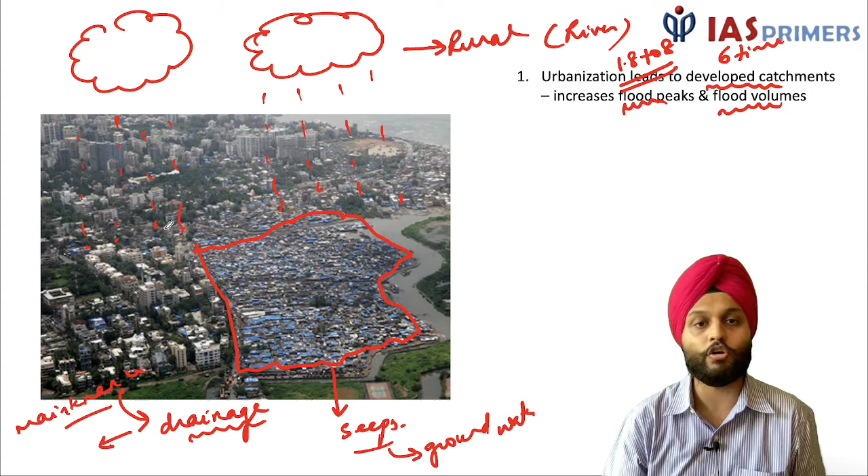So imagine the amount of water combined with high population density - the amount of damage it is going to cause. Particularly in slum areas, where the marginalized community lives in low-lying areas, they are worst affected. Their impact is much worse compared to other areas which are better off. So this is another perspective that needs to be looked into.

The United Nations Disaster Risk Reduction agency, responsible for disaster management, says it is unplanned urbanization and poor governance which intensifies the problem of urban floods. We know cloudbursts take place every year, so corrective measures are required, but they aren't being done. Hence, this is a man-made problem.

Stormwater drainage systems are getting overwhelmed, plus there is poor maintenance. Then there is poor solid waste management, with plastic waste choking the drainage pipes and decreasing their capacity to function.

And then there is the issue of encroachments taking place, like this example of slums, as well as encroachment into and identification of new lands for urbanization.

For example, in the nearby NCR region, there is a lake known as the Najafgarh Jheel. This used to be about 240 square kilometers, extending across areas like Gurugram, Rewari, and Jhajjar - a very, very big lake.

People are trying to divert and reduce the area of this lake, transferring it to identify new properties. Look at the construction activity going on in this area. This is being done by the unholy nexus of the political class, the bureaucracy, as well as the realty and construction sector - the corporates.

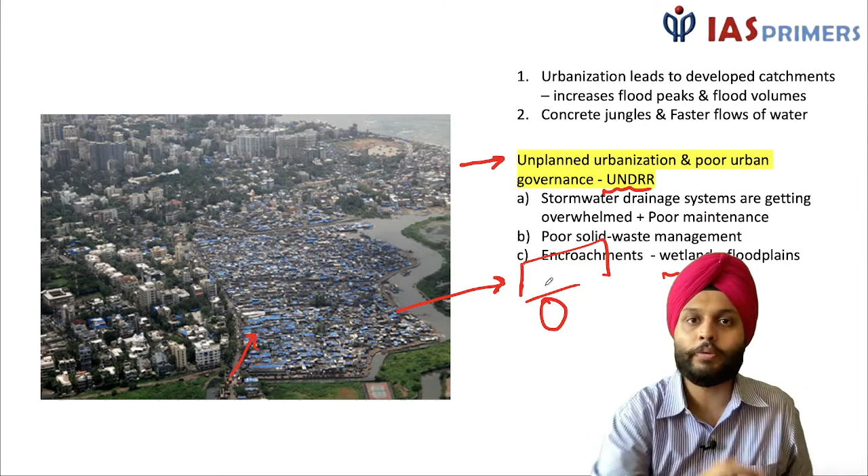Now moving on to the impact or implications of urban floods. You can see the image here and imagine the problems you might encounter - for example, if you're driving through it, you may be stuck in a traffic jam because it isn't possible to move, causing a lot of inconvenience.

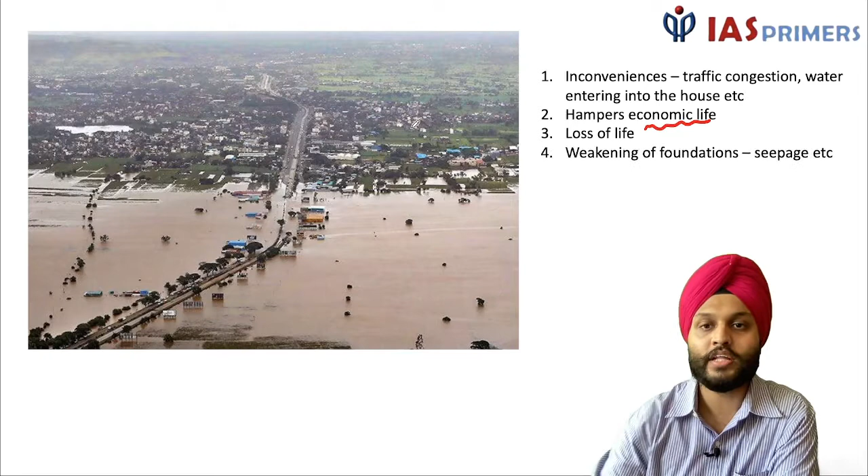Sometimes water enters your house and you're taking buckets and throwing that water out. This naturally affects all aspects of normal urban life and hampers economic life. There is also, sadly, loss of life, and weakening of foundations, construction damage, and loss of property.

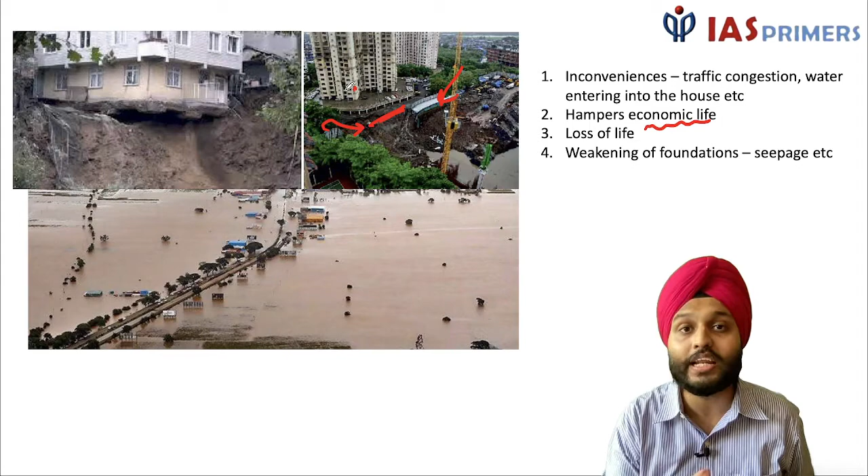Look at this image - this happened in Bombay recently. You can see how the apartment was almost about to fall. Because of the rain, erosion is taking place underneath. People aren't able to see it on the land, but underneath it's causing a lot of damage. This can be a major catastrophe - imagine if this building had collapsed, how many lives would have been lost. This is a major cause of concern.

What we often miss is the impact floods have on poor and marginalized communities. It is the poor who live in unwanted, low-lying areas that are more prone to floods. If this was a flyover, the land normally slopes downward, so most of the water comes into places where poor people take refuge under the flyover area. This is again a cause of concern.

Look at how the slums here are affected. Urban areas where the rich live won't be affected as much as people living in slums. Sometimes their houses aren't made of proper cement - they are temporary structures, so there's loss of property and loss of economic activities, because these people live hand-to-mouth.

Someone with employment in the formal sector can survive even without work - he'll get a fixed salary regardless. But for the poor, it's much more severe. When water is stagnant in a place, it's prone to cause diseases, and they are the ones poorest in income as well as most prone to diseases and disaster. This needs to be looked into.

Now moving to the last part of our session - recommendations or corrective measures. One obvious way is that we need to restructure and reconsider our stormwater drains, which as well as natural drains need to be restored and widened.

Now because urbanization has taken place, let's say this was the original area in which people were living, but over the course of time the urban area increases while the drainage system remains the same. So the drainage pipes need to be widened, and their capacity needs to be improved from time to time.

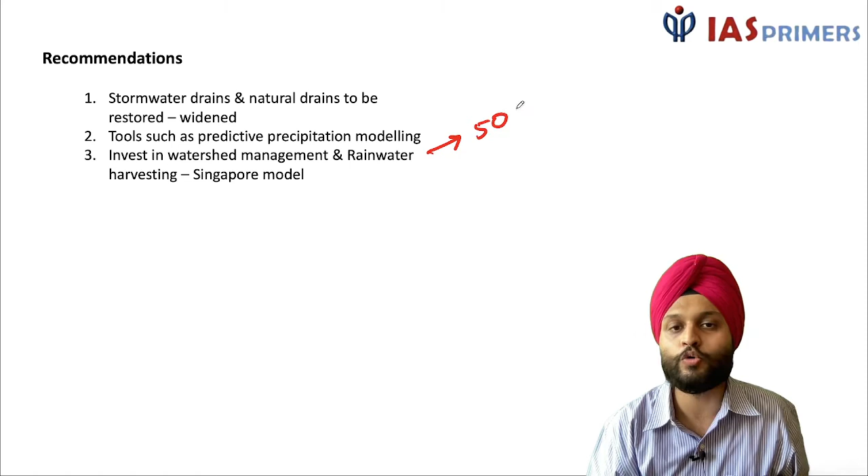Then we can learn from other countries. Singapore is one good example where there is scarcity of water. It's around the sea, but still there is scarcity of water, and it also witnesses huge amounts of rain. So what it has done is it has been able to use 50% of the land for rainwater harvesting.

So this can be done in any of the cities. We all know urban areas are short of water, so the buildings and apartments, whenever rain takes place, it can move to an underground tank. We can work on this model, and later this water can be used. Or we can look at construction of more parks and open land, which allows the percolation of water into the ground. So many places I have seen where there are huge parks built - apartment, then park, apartment, then a park. So parks are also very helpful in this regard.

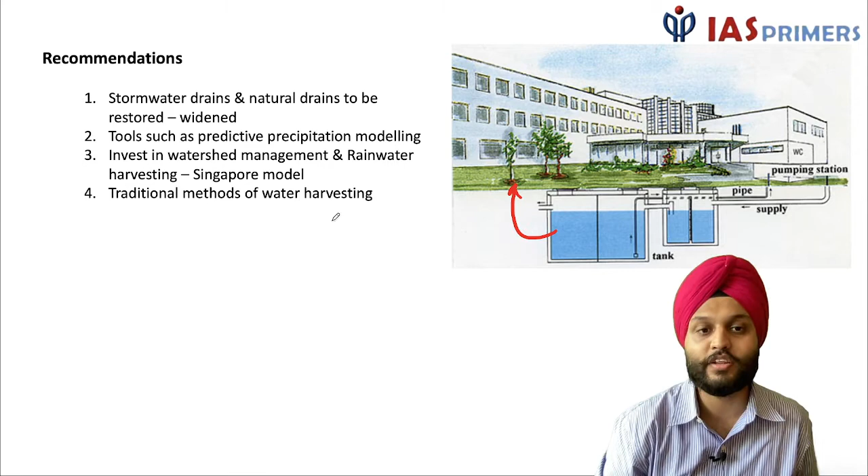Then why look at Singapore also? We have our own approach of water management and water harvesting. It is not that urbanization took place only after the British had left - we have a long legacy of urbanization, and for urbanization we need water supply. Water supply in the present times is done with the water pump, but these people in the past didn't have a water pump. Still they were able to harvest water resources for cities like Patliputra.

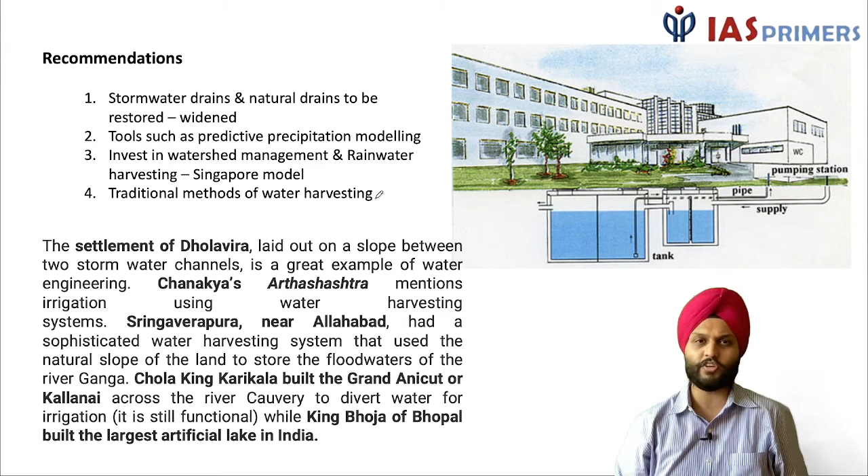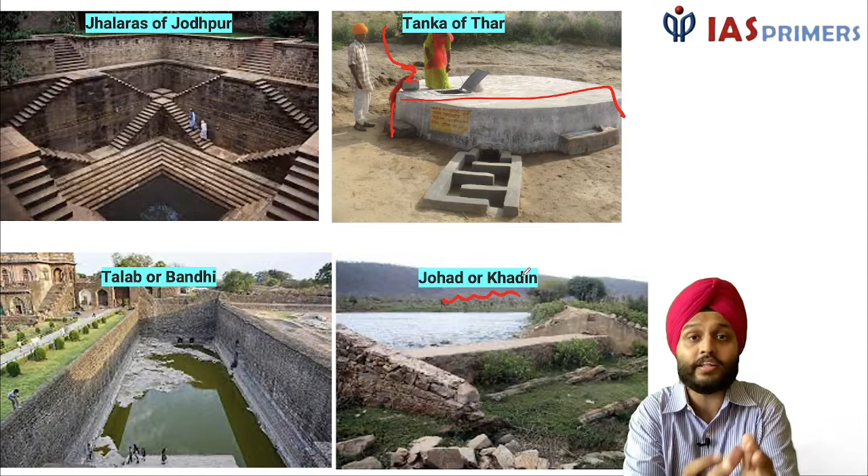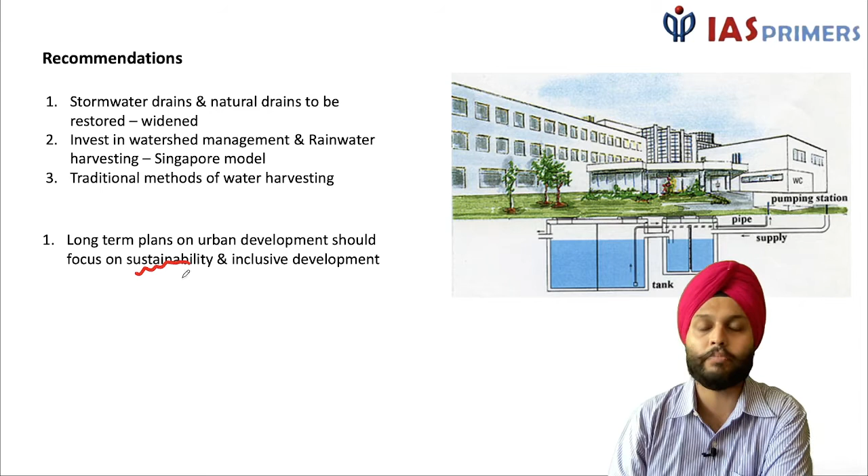Now moving forward on the recommendations part, we only talked about harvesting water and obvious things like stormwater drainage, etc. But we need to look into it in a more holistic fashion. We have to look into the issue of urbanization as such in a big way. For example, what about the marginalized communities, those who are vulnerable? So we need to look into the issue of sustainable urban development - where diversion of wetland is not taking place, which is done in a sustainable manner, as well as takes care of all the people that live in that area. So inclusivity needs to be considered.

Now recently Delhi is creating its own master plan 2021 to 2041, so it can incorporate certain features. Delhi is no stranger to urban flood, so this needs to be incorporated in that, and likewise for other areas.

And within this, we can also look at the approach of water sensitive urban design - urbanization keeping in mind the issue of water scarcity or water harvesting, whatever resources are required, designed right from the onset. So this can be done over here. And then we need to check the diversion of wetlands and floodplains.

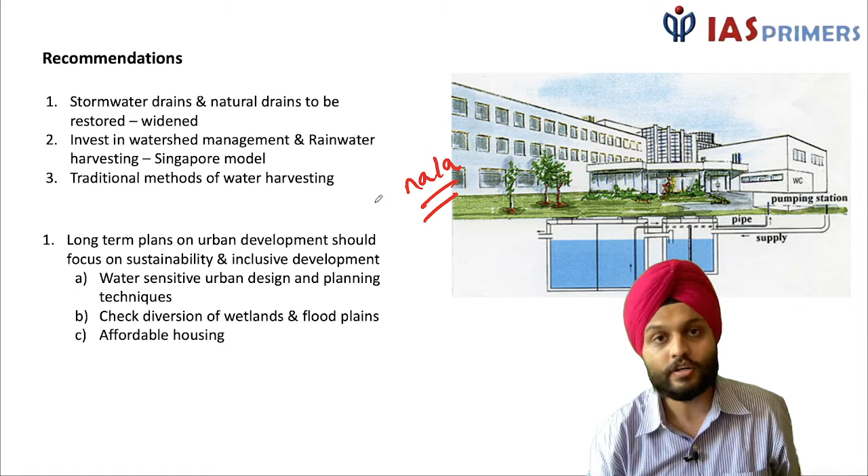And lastly, but most importantly, people should ask for reforms, and people will ask for reforms and hold the government accountable when they know about the problem. So we need to invest in education and awareness. It is not just a natural disaster, but a man-made disaster because man is not taking corrective action. So this needs to be looked into.

So this is all I have on this particular topic, that is urban flooding, and we have done it in a very comprehensive manner. So this is all we have.